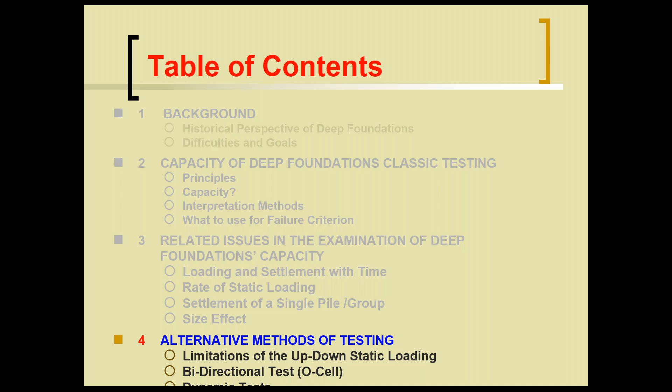I have to put a couple of slides on what I'm really dealing with most of the time - alternative methods of testing, limitations of up-down static load tests, a few slides on bidirectional testing. I wouldn't dare give a lecture to the memory of Osterberg without showing Osterberg cell results, and some dynamic tests. So let me go with the background.

First of all, we are part of a long-standing tradition - for 12,000 years we have evidence of people driving piles and building on piles. Four thousand years ago, the Swiss built islands based entirely on piles. We have evidence in writing by Herodotus, a 4th century BC Greek writer, who describes piles and pile driving. All the ancient peoples - the Egyptians, the Romans, the Chinese, the Mesopotamians - all relate to pile driving, and it didn't change over the years until about 100 and something years ago. They all drove timber piles into the ground by manual labor for thousands and thousands of years.

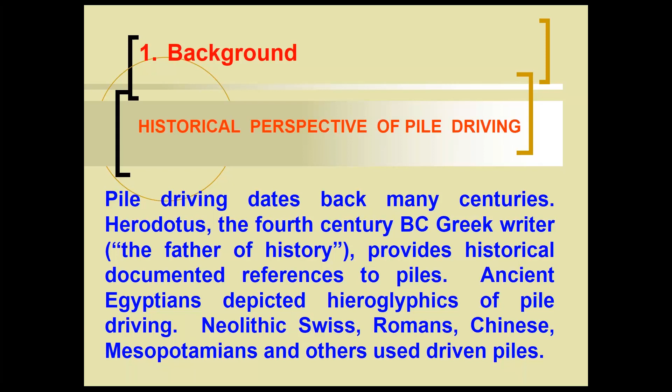We have Dutch friends here, and if you go to the Queen's Palace in Amsterdam, it stands on 4,000 driven timber piles. The machines they used were not that simple. This is, for example, a Roman pile driving machine used in the Gallic War by Julius Caesar to build bridges on the Rhine and the Mosel. If you go to Trier in Germany today on the Mosel, there is still a bridge you can drive on that is supported by timber piles built by the Romans.

A long tradition. Without getting much into it, you can essentially see there is a ram here made of timber, backed by a big stone. It can be inclined, so you can drive piles better, and it was working fantastically.

The first person to introduce mechanical driving was Otis Tufts - the guy Tufts University in Massachusetts, in Medford, is named after - and he invented the steam pile driver. That's not that long ago. Diesel hammers were invented after the Second World War. We're talking about 70, 80 years.

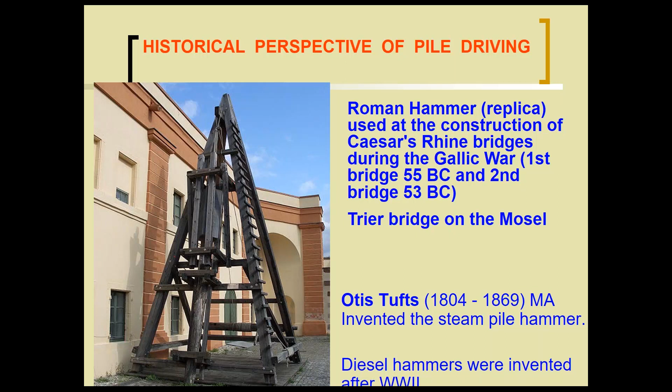We certainly have that within reach, especially the older piles. When we go to drilled foundation, it's much newer.

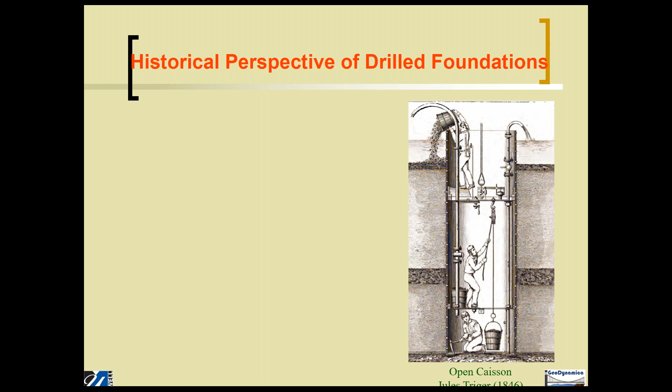This is a depiction of 1846 open caisson construction in Chicago, where essentially people dug by hand, cleaned it, brought it up in buckets while maintaining pumping of the water. If you look at that, it all started in the late 1800s due to large construction in parallel cities around the world—London, Chicago, Detroit, and so on.

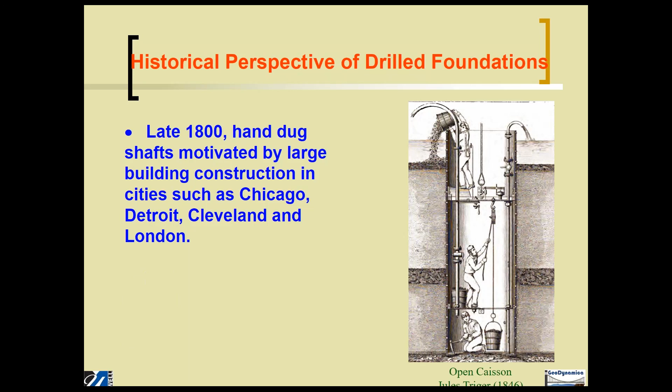And they all developed that drilled shaft foundation. The first person to start with a machine was Hough Williams in 1931. Just to put in perspective, Mr. Osterberg was 16 years old at that time. He built a very small machine for drilled foundation, nothing that you would consider as serious today.

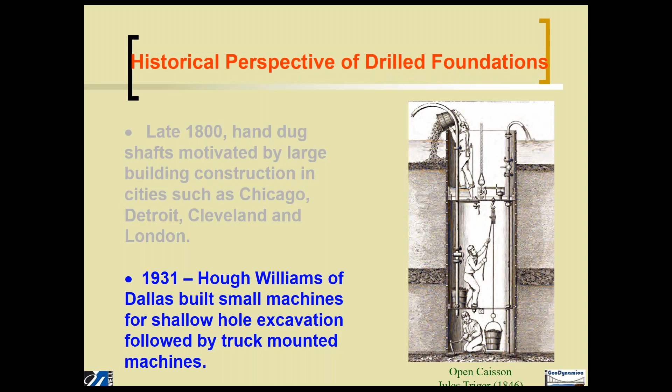So what we have done through this time, which is 70, 80 years, is enormous in pile driving and drilled foundations. We are sitting essentially on top of an era of unbelievable development in construction and methodologies of building foundations. Well, the problems remain, however, over the years the same.

We have a limited ability to check the capacity and the integrity of an element that we put into the ground, regardless of how we put it, and of course some areas are better than others. We have a very limited ability, and we have to struggle with that. As a result, we have uncertainty and conservatism that plagues the profession.

When we started collecting databases about 25, 30 years ago, there were the first databases that could show any performance of analysis. I remember giving a lecture in 2002 in Japan, where they gathered all the people around the world that dealt with reliability.

The lecturer before me came from Europe, and he said, we built all these wonderful Eurocode 7, however, we don't have any data to put into it. And then I showed up with hundreds of files that we analyzed. So uncertainty and conservatism really plagued the profession for years, and still is an issue we are dealing with today.

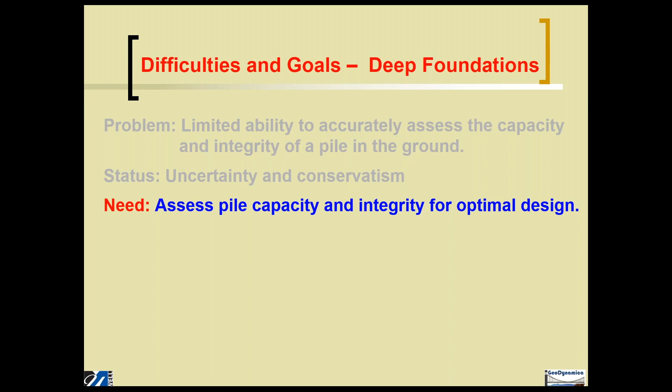At the end of the day, we put a member in the ground and want to make sure that it performs. So what we need is to assess pile capacity and integrity for optimal design, and the method is essentially testing. We are looking for testing that provides resistance, capacity, and integrity along with the soil-pile interaction, which we don't always get, and we'll talk about that.

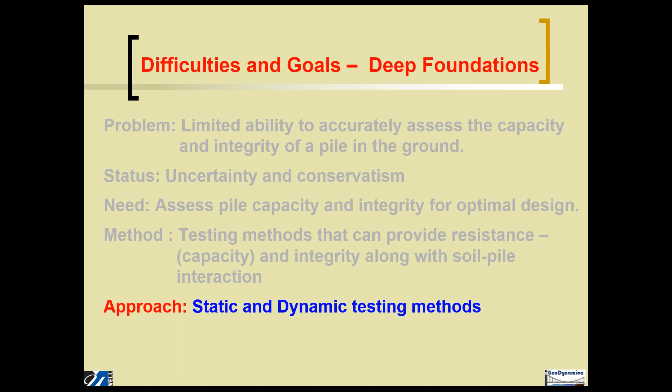My major approach, as I said, will look into static and dynamic testing of deep foundations, but I'll concentrate mostly on the static testing with limited reference to other testing methods, although that's essentially most of the work I do. I started explaining this in lectures these days, and I could certainly show you beautiful projects and interesting stuff, but I chose to go to the basics. Let's go to the basics.

What's the principle? First of all, the principle of the static testing is the up-down load test. Why is it an up-down load test? Because we are simulating the loading that we have—they are all gravitational, and they come from up-down, unless we have a pull-out or something of that sort.

It is, as a result, a benchmark for all the tests. It doesn't matter if we run dynamics, statnamic, or Osterberg—at the end of the day, we compare it to the static load test as our benchmark, and therefore it's important for us to understand exactly what we are doing and how it works.

So we have the capacity—there's a basis for capacity discussion. I promise I'll bring all the elementary stuff. So essentially, what is a test pile? What is pile testing? The load test—we have a test pile in the ground, either driven or drilled.

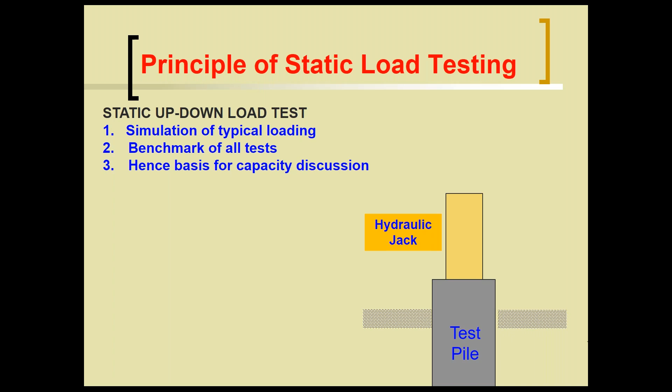And we put a jack on the top in order to apply load. And when we have an action, we need a reaction, so we put a reaction beam. Essentially, we put the action on the pile and the reaction against the beam. In order to hold the reaction, we use either anchor piles or anchors in the ground, which are being pulled out, or we use a dead weight to provide the reaction.

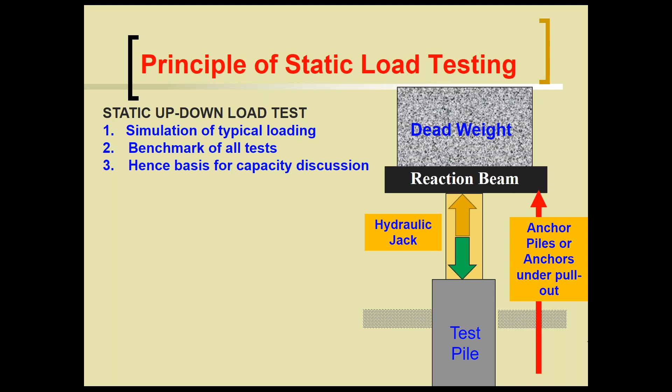We measure top force and displacement. This is the classical load test that we are running. If we really want to learn more, we have two things to get: first, to bring that pile to failure, and second, to really measure the interaction between the soil and the pile, which we can do only if we measure local displacement by telltales.

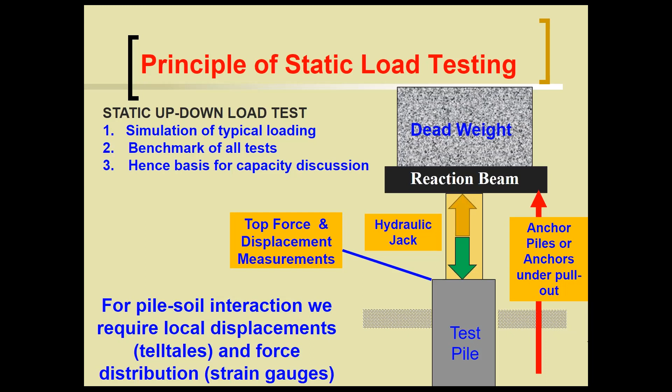In the past, we used them also for force distribution, which is not yet easy or accurate. For that purpose today, we are using strain gauges, and we have seen results of it earlier. ASTM provides us with all kinds of arrangement.

If you want to see the way it looks in real life, that's the way it looks. You will have, for example, 4 H-piles with cross beams that will support the reaction beam, and we apply the load. If we want dead weight, we can do that, and I have some nice pictures from India where essentially sacks of sand are being used as dead weight.

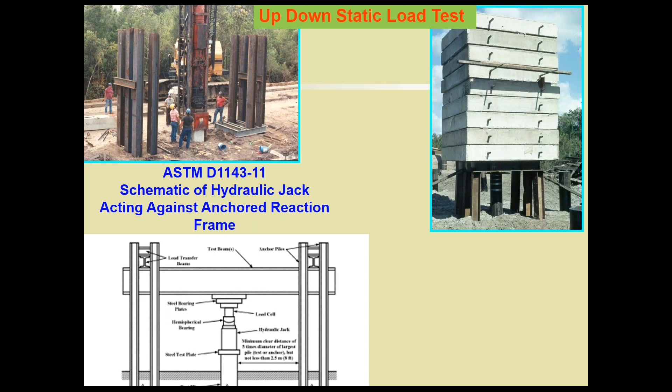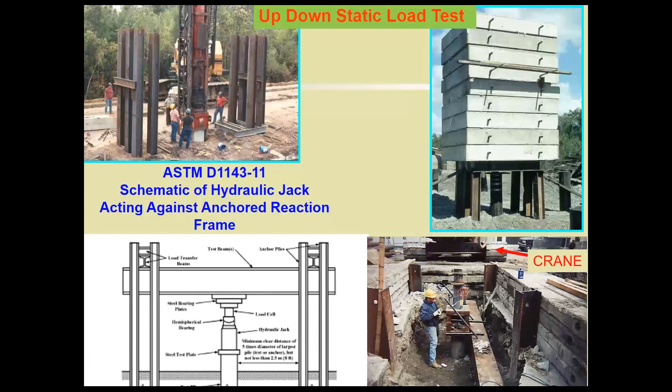And one nice one that I decided to show is an old one that was done by us, in which actually we use the crane. I don't think OSHA would ever approve of that anytime, and I don't suggest you'll do it yourself, but that was a long time ago. You can see we built a pit that looks more like an oil change in a garage, and then the crane that was in the background came forward, and we jacked against the crane as the reaction.

Innovation is all over the place. What is the largest one that I ever was involved with? It was a 72-inch pile that I just mentioned earlier, in which we actually checked plugged piles, comparing dynamic testing on full scale. This was a 3,000-ton load test, static load test.

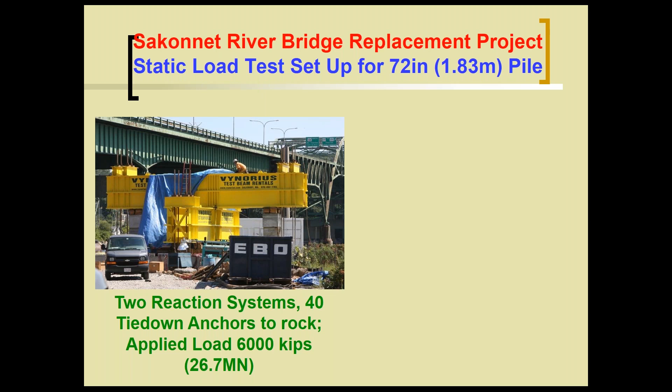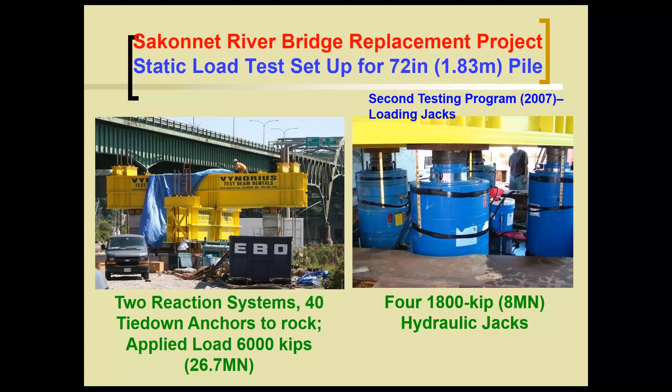You can see the two reaction beams crossing each other in order to get a huge moment of inertia at this huge loading, held by 40 tie-down anchors to a rock, and having 4 jacks. Each one is 900 tons. This is a massive load test that cost a few million dollars and was well justified.

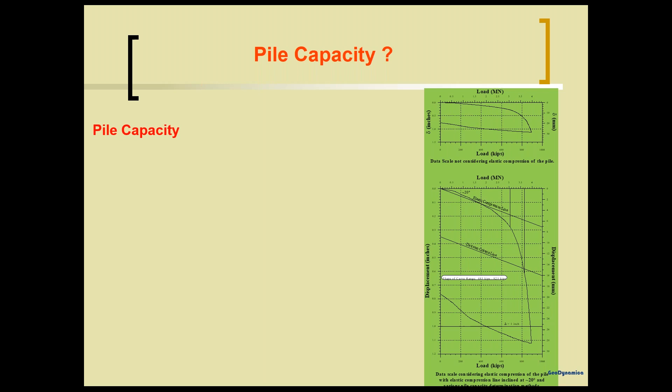And we ask ourselves, what is the pile capacity? So we want to interpret those results, which are the basic results from the measurement on the top of the pile. We first of all have to assume that we really arrived at failure, and we have a yield in which the load displacement can be examined. We're essentially looking at a location where we have excessive displacement under a small increment increase in the load.

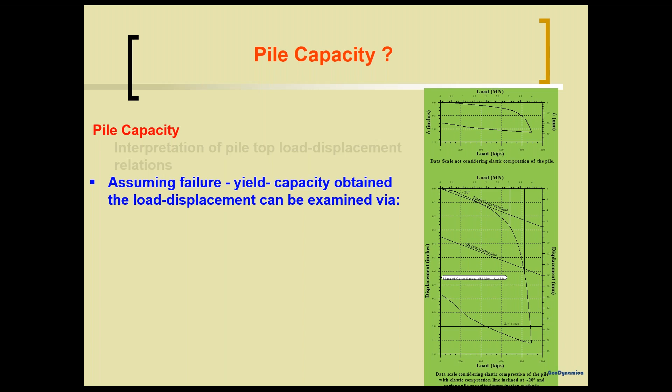We have displacement criteria that were used for years: 1 inch, 0.1b, all of them will do that. My friend Bengt Fellenius claims that our entire design of the pile should be essentially associated with a displacement criteria. We'll talk a little bit about that too.

There is the shape of the curve. When do we come to the point where we accelerate and we move from one regime to another regime of behavior, from elastic to more plastic behavior? And the interpretation often is not a unique value.

For that result, I would like to look at the load test that I'm just showing you here. I would like to see, if we look at the load displacement behavior here and here, you could guess probably where the capacity would be. Probably in this case it can be someplace here, and in this case it will be someplace there. I don't ask you because of lack of time, but I'm sure that you would more or less agree. The point that I'm trying to bring is this is the same load test.

It's the same data, just thrown on a different scale. So what I show you here is exactly the same load test, just on a different scale. The conclusion is, if you want to examine a load test, you have to look at a systematic scale that gives you proper interpretation. Those of you that remember Davisson many years ago, he came up with the idea that if you take the scale such that the elastic compression line will end up at 20 degrees, that will be a good scale to evaluate, and we use it systematically when we evaluate a load test.

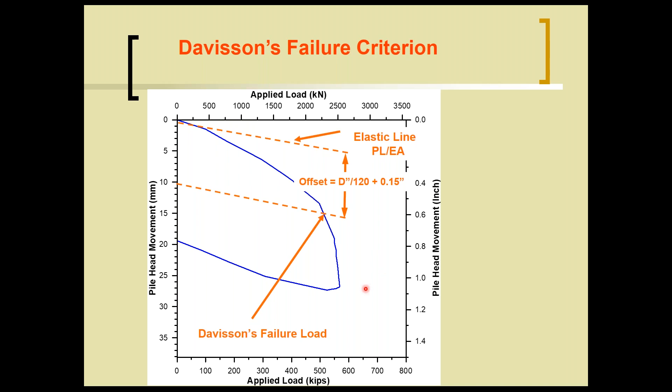He said, draw the elastic compression line, which essentially means take the pile with its characteristic as if it's freestanding and loaded, like it would be a column. Draw this elastic compression line that you learned in your first class in civil engineering, and then get an offset, and the offset is the diameter of the pile divided by 120, plus 0.15 inch.

Where did he take it from? The D over 120 comes from his assumption that that will be the displacement required to mobilize the end bearing, and the 0.15 inch comes from the displacement for developing local friction, which is independent of size.

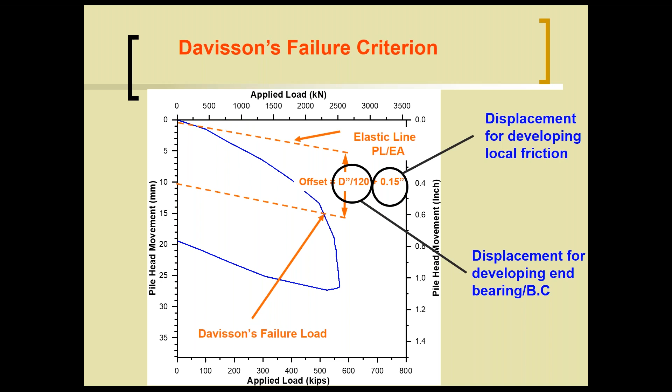We can check if he is right or wrong, but before that, just put scale in mind. In engineering today, with all the numbers running, the most important thing is to have scale in mind.

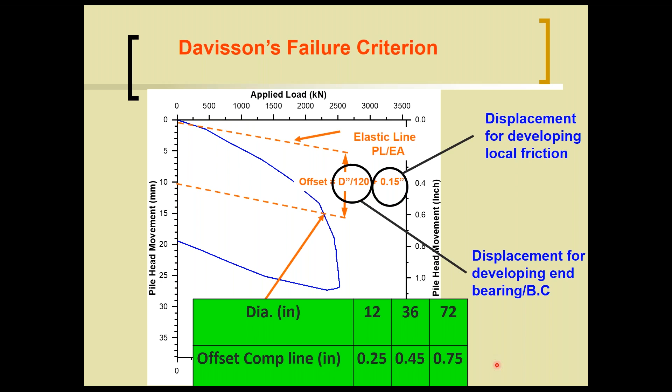The scale here is that if we have a 1 foot pile, we are talking about an offset alone of a quarter of an inch. If we have a 3 foot pile, we are talking about half an inch, and for a 72 inch pile, we are talking about an offset of three quarters of an inch. That becomes sizable, and in addition to that, we have the shortening of the freestanding column.

I'll show you in a second. To check the friction in undisturbed mode, as if it is actually a pile shaft that does not have any restrictions above and beyond what is the friction.

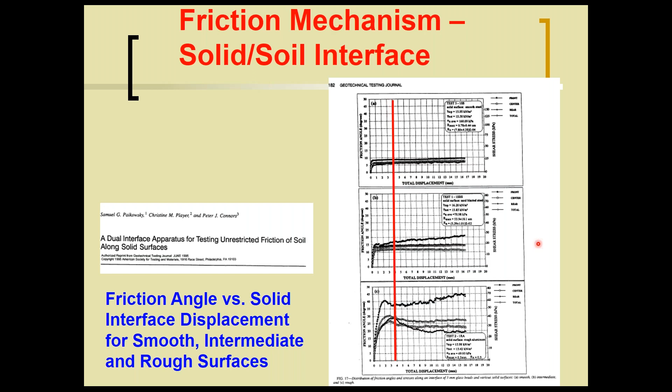Later on, I'll show that this is good only for piles that develop straight typical friction, like driven piles. It's not necessarily appropriate for drilled foundations, and we'll explain why.

We have all these criteria that hopefully you know: Davisson, shape of curve, displacement, and also maybe to mention De Beer, who developed it actually for shallow foundations, where he suggests drawing the load displacement on a log-log scale.

Somebody told you before about the square root or the square. That's the same situation in engineering. You draw everything on a log-log scale, and it looks reasonable.

The idea really behind it is to change the regime. Where does the regime change in the loading from more or less elastic to plastic, and then the asymptote of those lines is the failure, and it's certainly a good criteria for shallow foundations. We use it all the time.

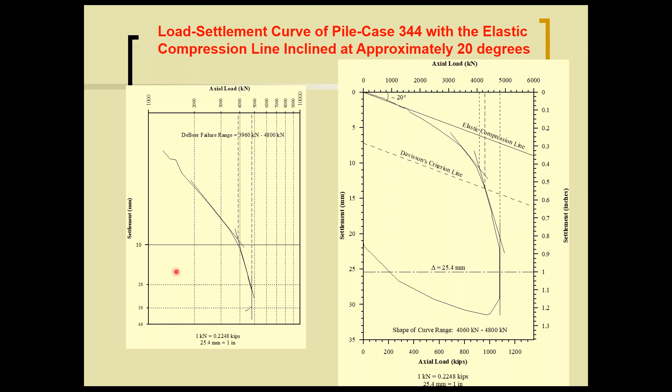Well, when we started working on those things, we collected a large database. That's an old database. Some people refer to it as the FHWA - it's not. FHWA helps us.

We took all these cases, digitized all the load displacement, analyzed them, first plotted them in a systematic way, just as I showed you, and analyzed them systematically. That was essentially the beginning of systematic calibration for the LRFD that came after. What we did there was evaluate, at the end of the day, what is the capacity, which is what is in this yellow row right here.

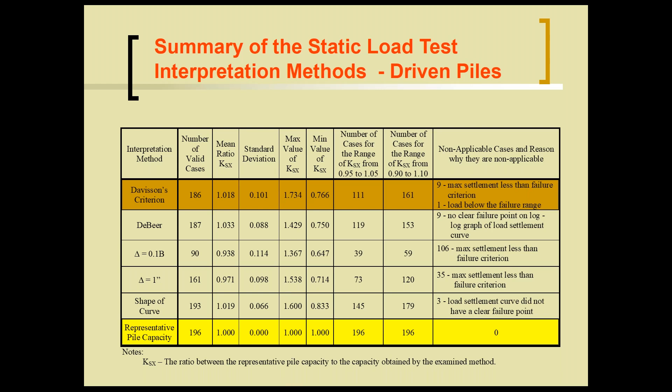And then compare each one of the methods to what we would consider the true capacity here. How did we define the true capacity? I can explain, but in short, it is the average of the viable solutions plus the shape of curve, which has some judgment in it.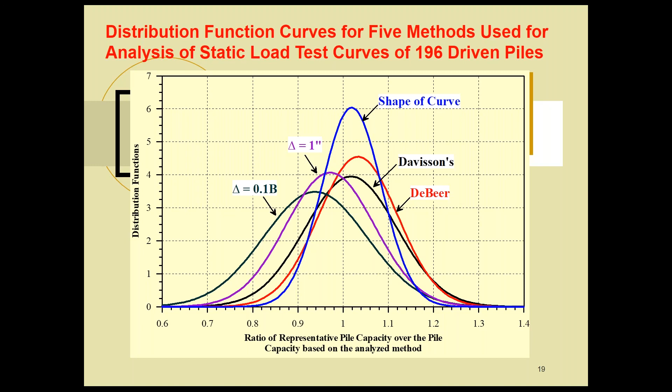And you can see that it worked fantastic. It actually works very well, and that should have been the method for us to analyze driven piles. So the Davisson failure criteria is the most objective, reasonable, unique method that provides a good result for the analysis of driven foundations. However, bear in mind this distribution.

It didn't work for all the piles. Within one standard deviation, we essentially took 0.15 up and down from the actual result. When I say 0.15, it means the ratio between what Davisson criteria would give versus what we thought is the actual capacity of the pile independently. And then we recommended, and later compared all the load tests we had results for, dynamic, static, no matter what, to that criterion. That's what we used, and most people, I think, adopted Davisson criteria.

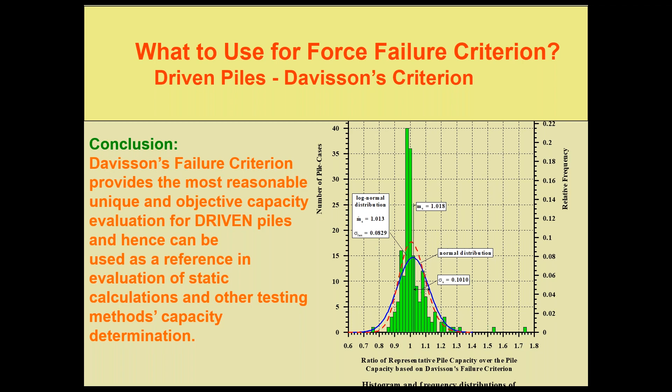We did the same for drilled foundations. There's no need to go here. We checked it on Davisson, De Beer, shape of curve, and what's called the FHWA method, which is O'Neill's method. And again, we got a distribution and so on. Davisson did not work well for drilled foundations, and you can see that. So if you use Davisson failure criterion for drilled foundations, there is an inherent problem.

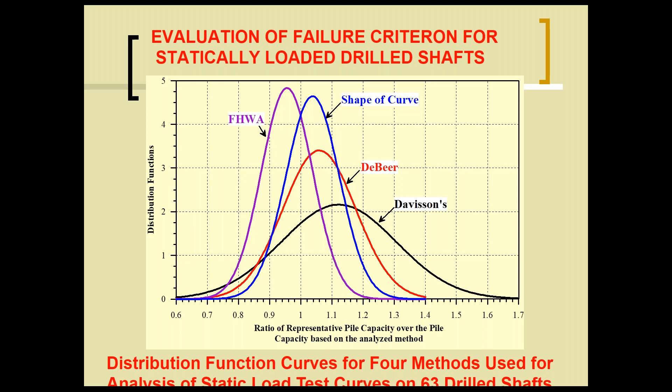We can explain it later in the lecture. What did we use? We used FHWA or O'Neill's criterion, 0.05B as the displacement. The takeaway from these few slides is that there is no unique failure criterion.

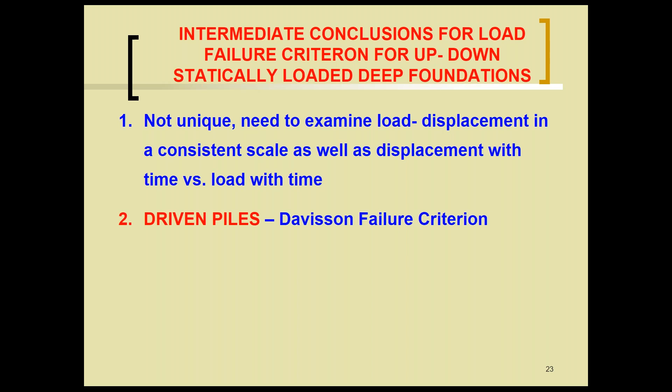You need to examine load displacement in a consistent scale, as well as displacement with time versus load with time, as I'll show soon. For driven piles, use Davisson failure criterion. It's systematic. There are a couple of exceptions, and I'll talk about them. And for drilled foundations, use Mike O'Neill's criterion of 5% of the diameter as the displacement at which you assign failure.

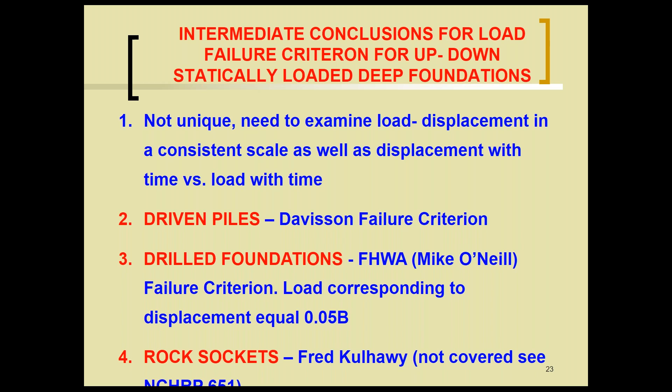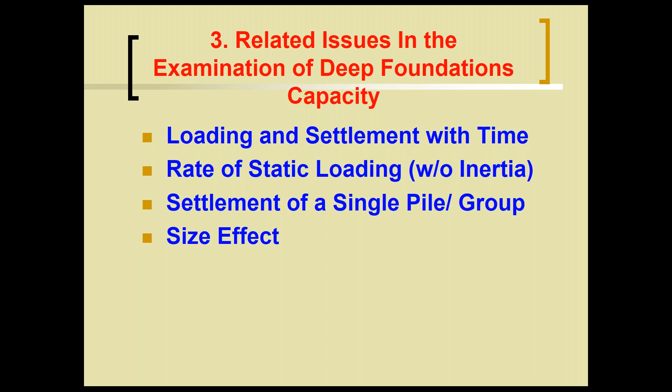So let's look at a couple of related issues. First of all, what did I mean by loading and settlement with time as a result of the load test? What is the effect of rate of static loading without inertia? The settlement of a single pile and a pile group, and a size effect. We'll do a few slides.

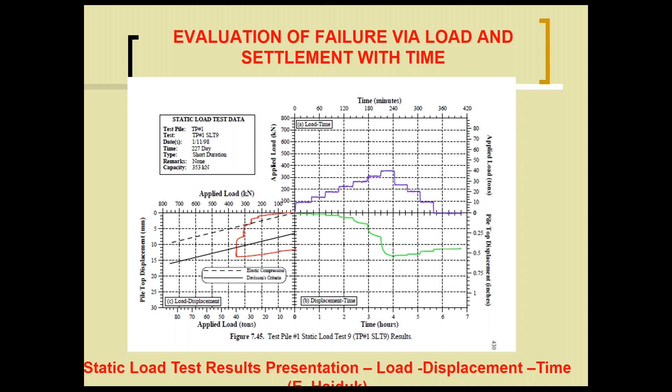You can, by looking at the load with time, especially on slow maintained or quick tests in which you have periods where you're holding the load, see very clearly where creep starts and you're essentially not able to hold the load. Same with the load and the displacement. Looking at those things is exceptionally rewarding and gives you a lot of insight. In today's time, when you collect the data, it doesn't really take much, and you get a lot of information. Let's look at the rate of static loading.

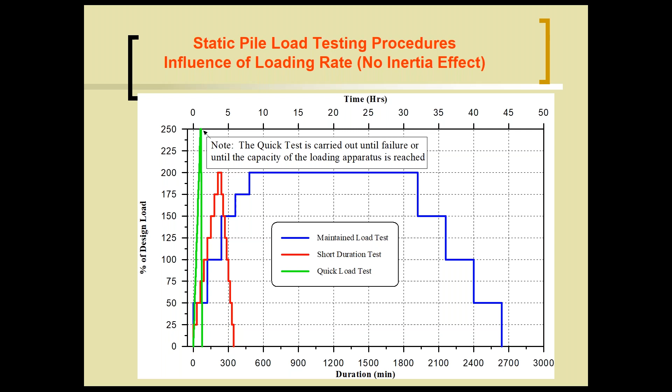It's not dynamic. What we did was run pile load tests - actually many more than I'll show you - comparing 3 testing methods on the same pile. On the right side is a concrete-driven pile, on the left side is a steel pile. What you see are 3 results.

The blue line is the slow maintained test, which took more than a day - the regular slow maintained test with 12 hours holding and so on. The red line is the short duration test, something in the order of 6 to 8 hours. And in green is a test we developed in collaboration - I'll speak about that in a second - a very quick load test. You apply 3 cycles of 15 minutes each of loading, come to failure, unload, reload. Each green cycle is about 15 minutes, so the whole test takes 45 minutes.

You don't see a big difference between them - there is no difference. As a matter of fact, the cyclic tests have a big advantage as far as defining failure goes. I can't go into it much deeper, but if you look at this location, the point where you have the load-unload intersection is exactly where you would define failure. It's on the books in the Massachusetts Highway Department. I'm not sure how many people use it, but the rate effect within quasi-static behavior is of no importance unless you're especially interested in creep.

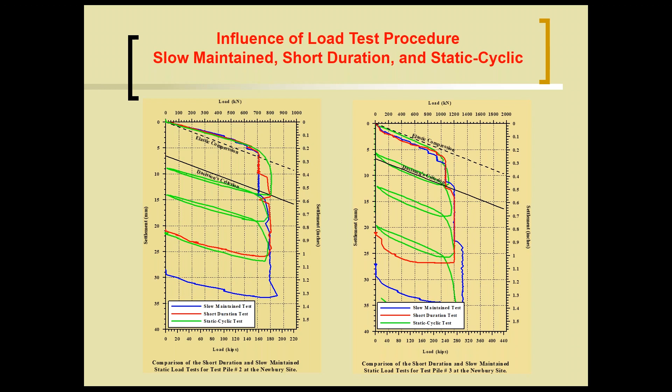So we collaborated. That was the time, under the Soviet Union, when there was a lot of fundamental research which was really good. These are 75 pile cases comparing slow maintained load versus the quick static cyclic test I just showed you, up to very large relative capacities. It shows there is no difference between the two, so you can run load tests with relatively fast duration and get the same result, as long as you come to failure.

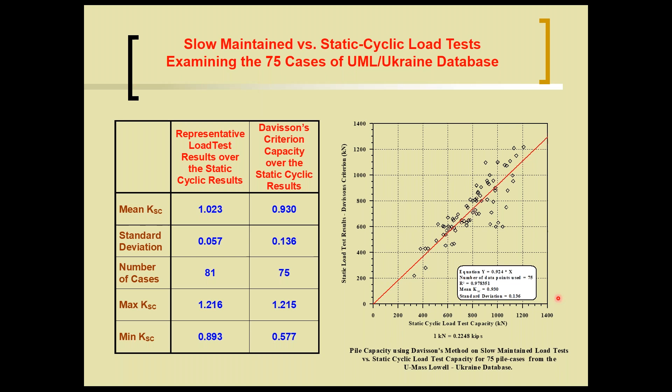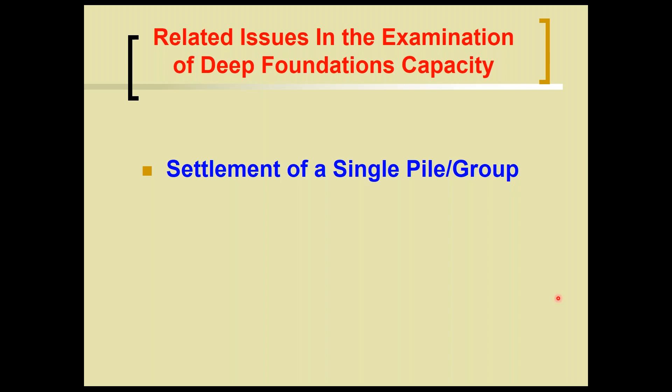Let's move now to settlement - what's going on with the settlement of a single pile and pile group? In general, in our practice, we tend to think that once you design a pile for a design load, you don't have an issue with settlement. We collected a lot of data about that. What you see here is essentially 5 groups of different piles - H piles, closed-ended, open-ended, drill shaft, and so on. Each cross represents a mean, standard deviation, and the extremes for one group of piles, checking the settlement of the pile under the design load.

The central red cross combines all the data of 105 piles. What you see is that the typical pile under the design load - all the way up to more than 2,000 kips, more than 100 tons, 1,000 tons - essentially maintains a settlement within about a quarter of an inch or less. So our common practice is: once we set a capacity and go to a design load - which, if we have a load test, is typically half of the capacity - we have very limited settlement, and we're pretty fine.

As a result of that, the load of the average is very high. You can see it's close to 2,500 kips. However, the average settlement is about the same. It's smaller than 0.2 inches.

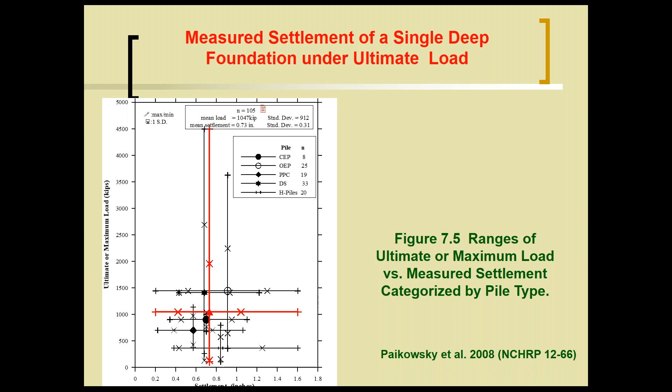The next thing to look at is what happens if we have a group of piles. Definitely in driven foundations, we work only in groups, and that's the ratio between the settlement of a group of piles to a single pile as a function of the spacing. So typical spacing will be 3 diameters, and that's about 1.5 times.

If we go to smaller spacing, which is 2 diameters, which essentially we don't do usually, we come to a large increase in the displacement. If we go more than 3 diameters, to 4 to 6 diameters, we are talking about 1.25 times the single pile settlement of the group.

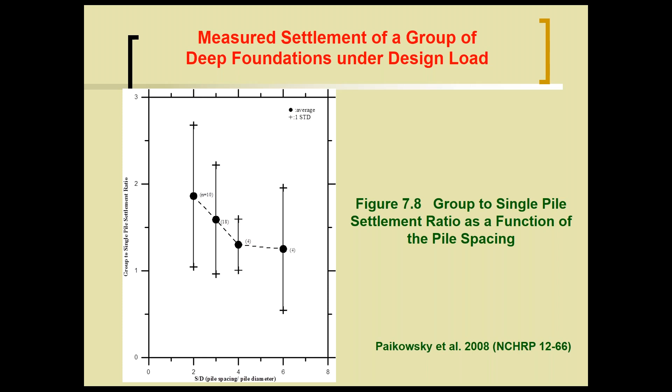The last one was size effect. I don't show much data, but I'll explain what I did and why. There was a claim the Davisson criterion is not good for large piles, and that we have to increase the tip displacement ratio instead of B over 120 to B over 30. That was the claim.

We decided to check it independently, and we examined it by looking at a database in which we showed the bias of the method and whether it changes with the diameter. Then we took a separate group of 30 large piles that were over 2 feet in diameter and checked whether the criterion really changes if a failure goes there. There is no justification for that. Davisson criterion worked fine for large piles and small piles, and the criterion is good. There is no need for modification. So the size effect was not really anything that we got.

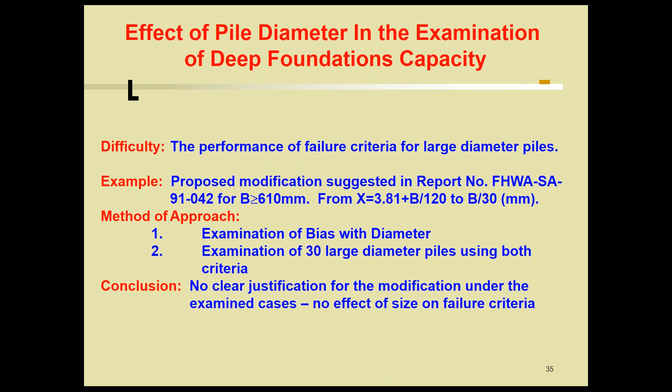Well, we are coming to alternative methods of testing. So why should we use alternative methods of testing? Because the static load test has major limitations, and you could see it in the presentation today. They did not run a static load test.

I, as a matter of fact, started my career in 1979 measuring dynamic measurements with an analog PDA that not many people would know what it is, and measuring static load tests on offshore piles to full capacity. It's very expensive. There is no question that a static load test, up-down, is very expensive.

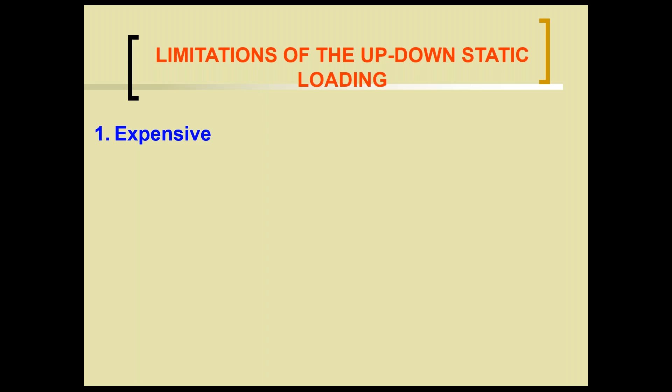It's very time-consuming, and I'll show you in a second what you need to do if a certain phenomenon is immediate, to test right away.

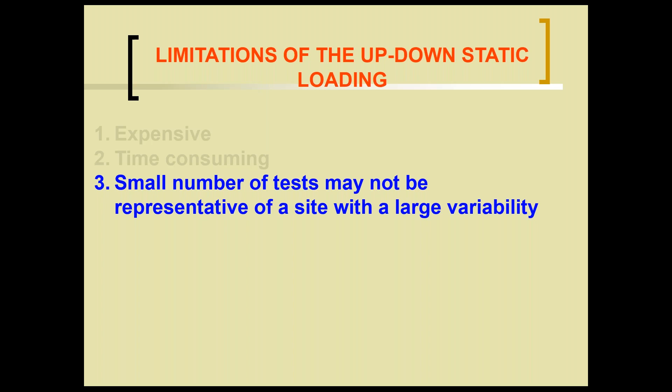We're running a small number of tests. They cannot be representative if there is a large variability. Unfortunately, the current AASHTO specification took out our portion in which we connected the number of tests to site variability, and explained how you get site variability as a number and what number of tests you should use. It's not there anymore, but it should have been, because that's part of the issue: how many tests you need according to the site variability.

And then if you have a problem, let's say you drill the drilled shaft and you want to test it, and the drilled shaft got screwed up. What do you do? You're ending up with one test that is not good, but the foundation is good. So all these difficulties really give us the limitation of the up-down static load test.

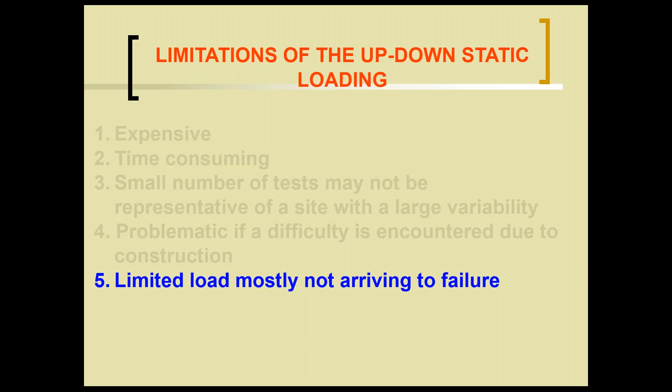In most cases, we don't even come to failure. I remember when coming to the United States, I was interested, and I found out that only 8 states in the Union had a code that requires a static load test to failure. The majority requires twice the design load or a little bit above it. So if you don't get to failure, you essentially don't learn too much, because it's a proof test and not a load test. And of course, that's generic.

You need additional effort of strain gauges and measurement in order to measure the distribution with depth. All right, let's touch on the Osterberg cell, or the bi-directional cell, the new ASTM standard. I'll just bring a few slides on here.

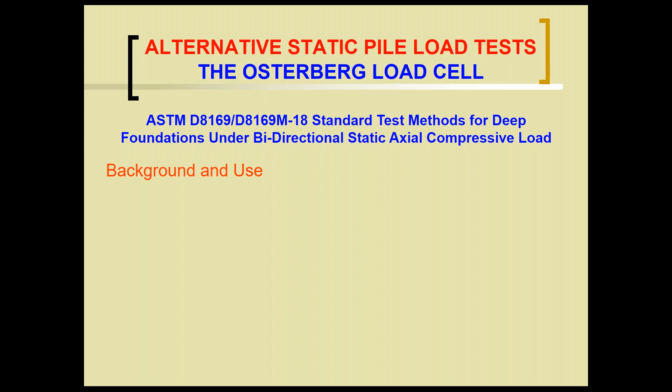We don't have the time, but I don't think it's appropriate to give this lecture to the memory of Jorj Osterberg without mentioning the Osterberg cell. That's certainly the other alternative for a static load test, only that we are loading it from the bottom up instead of top-down.

His major innovation was essentially developing something consistent, good quality engineering. I knew before that people were using flat jacks to measure drilled foundations, small ones, and it worked fine, but it was not the same. He really established a methodology that worked technically fine, does not require reaction, and as a result, we are much more affordable. Of course it has disadvantages too, but that was the biggest advantage - to be able to load test especially large elements like drilled foundations.

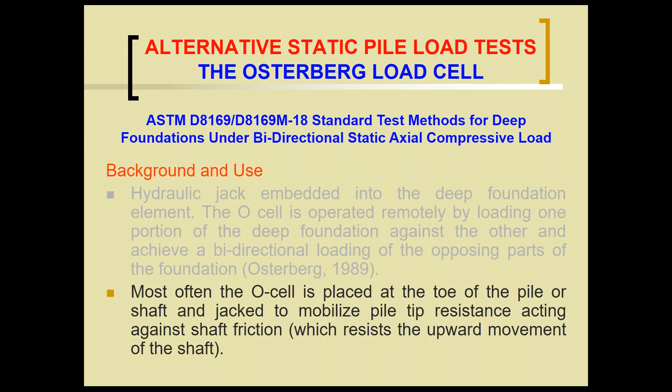Mostly we put it, as you know, on the bottom part, either on rock at the real bottom or above it, and we run a test. I'll just show two examples which are non-traditional, because otherwise we didn't get much out of it - it's repetitive.

This is an Osterberg cell load test that sponsored this lecture many, many years ago, and we actually mounted it on a driven pile, at the bottom of a driven pile. At that time we developed a 6-inch stroke, which was not the common design. It was a 100-foot pile.

Why did we do that? Because we were interested in gain of capacity with time. Until you build the reaction and everything, most of your data is already gone - you essentially load the pile after it already gained 3, 4, 5, 6 times its capacity from the beginning of driving. So we did that.

Those were our piles - there were 3 piles actually in the test. You see them on the left. The one that went all the way down is about 100 feet long, that's TP1, and where you have the red circle on the bottom is an Osterberg cell on a driven pile.

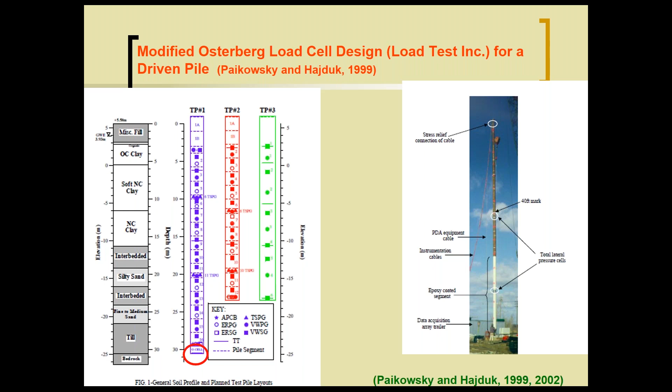I won't get into much of the study, but I'll show you that we ran this test, and the measurement here is hours after the end of driving - so you can avoid the zero at the beginning, at the end of driving. You can see that pile had very little capacity; within the clay layers there was no resistance whatsoever.

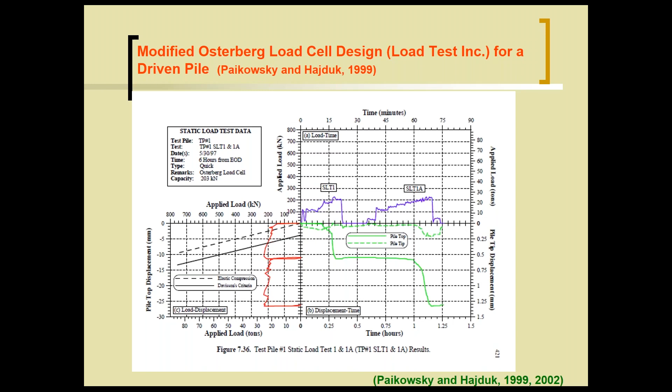What I'll show you is the gain of capacity with time. The first test was completed within 6 hours after driving the pile, and you can see the resistance, shown here in kN on the right or tons on the left, and it's minuscule. As a matter of fact, it was practically zero at the end of driving within the clay due to the high pore pressure that was developed.

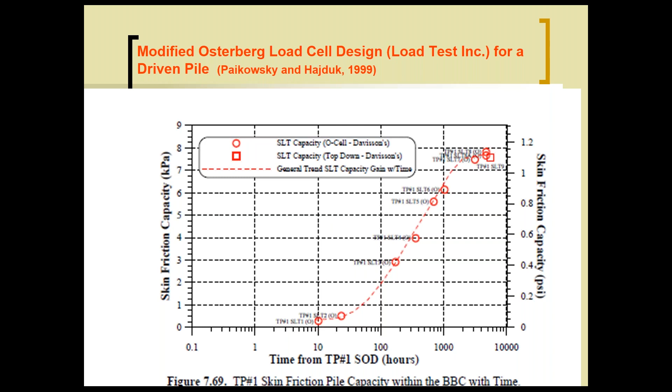The other example I'll show is a recent test done with GRL in Israel. What you see is the thermal integrity profiling of a bidirectional load test, and there are two issues to take out of it. First, you can phenomenally learn about the shape of your drilled shaft exactly the way it's built - tremendous knowledge, well beyond CSL which only gives you integrity between the tubes. On the right-hand side you have the TIP analysis.

You can see the bottom where the load is, but more interestingly, look at the shape of the pile - that's not unusual for a drilled foundation. What does it mean? It means that when we load elements like this, we do not have typical frictional behavior. We have it in areas where there's a change in diameter, and that's actually nice.

In CFA, we can get much more than that. But we are talking about these areas - a relatively large change in diameter, which contributes much more than asperities in the friction between solid and soil.

That means essentially you have another mechanism, more associated with end bearing resistance, rather than top down. As a result, when we checked those drilled foundations and came up with what kind of interpretation would be appropriate for the load test, Davisson cannot work for that, because the entire mechanism we see in drilled foundations very commonly is not the typical friction.

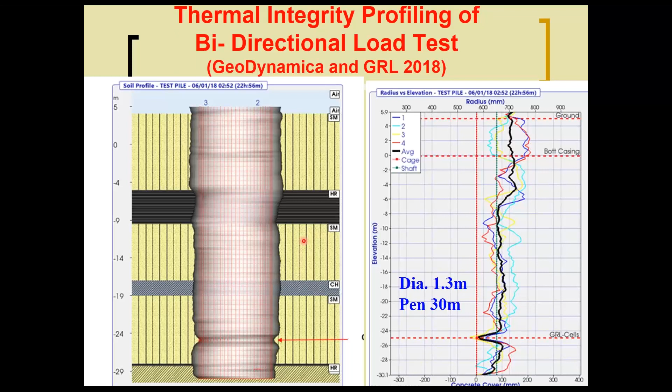That also affects our dynamic test results. Very often we see these results and people say it doesn't mean anything, it's not good. Well, that's part of the issue we have - the friction is not the typical friction that we see.

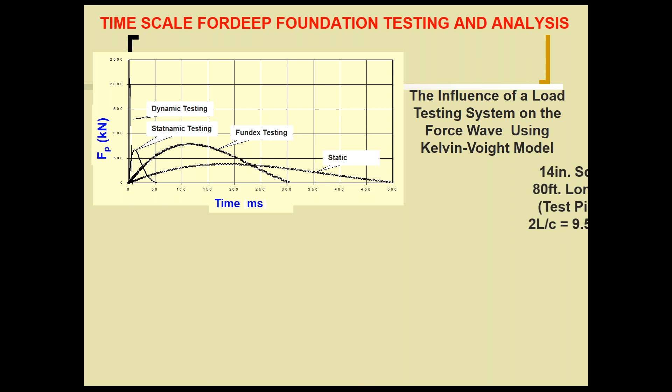And the question is, does it really look like that in real life? Here you have one of our tests on a 14-inch square pipe pile, a concrete pile, and you can see the actual measurement from a dynamic wave to a statnamic wave test that we ran, to static cyclic, which takes very fast, 15 minutes, all with short duration. I didn't put the slow maintained load test here because the scale would get out of hand on the next slide.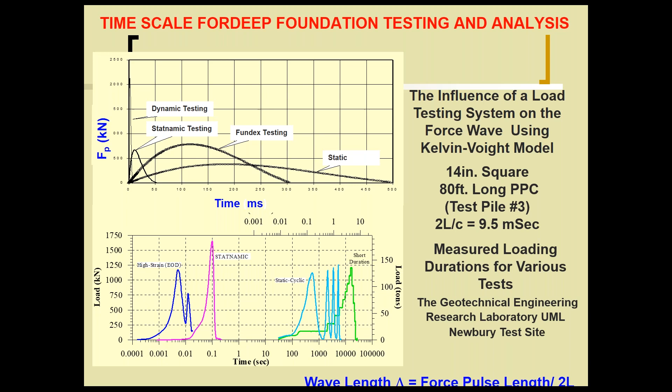You can see there's a real importance to this - it's not only academic. What it means, and I can't go deeply into it, is that if we measure the so-called wavelength - the whole concept was developed by Holeyman - you essentially measure under the dynamic effect what's the length of the wave you send relative to the distance it has to travel down and up. The shorter the wavelength, the better you can analyze the interaction of the pile and the soil. So every method has advantages and disadvantages. Bear in mind, when people give you analysis of a driven pile with CAPWAP and others, that there are advantages and disadvantages.

Just a couple of words on the basic principle of dynamic testing. Essentially, we are trying to get a static capacity out of the dynamic behavior of the pile during driving. Why can we do it? Because in principle, if we run a driven pile or impact a drilled foundation and that unit moves, we essentially conduct a very fast load test under each blow. So there's a well-justified basis for taking the dynamic results under a single blow and looking at it as a load test. It's a quick load test, as long as it penetrated - you had a load test, or if not, how long?

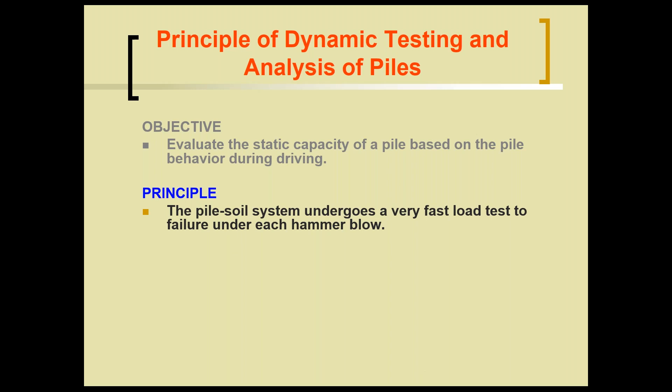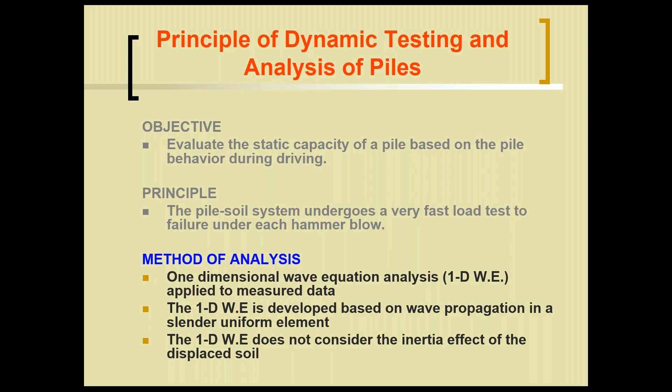What is the method of analysis we are using? We use the one-dimensional wave equation, and here comes the pitfall. The one-dimensional wave equation was developed on the basis of wave propagation in a slender, uniform element. If you want to move from three-dimensional to one-dimensional, you have to simplify by assuming the element is uniform and slender. Okay, that's fine - that happens with most driven piles, that will be the case. However, it does not consider inertia effects, and in many of our analyses, we violate that. Thanks to the lecturer before me, I can refer to it.

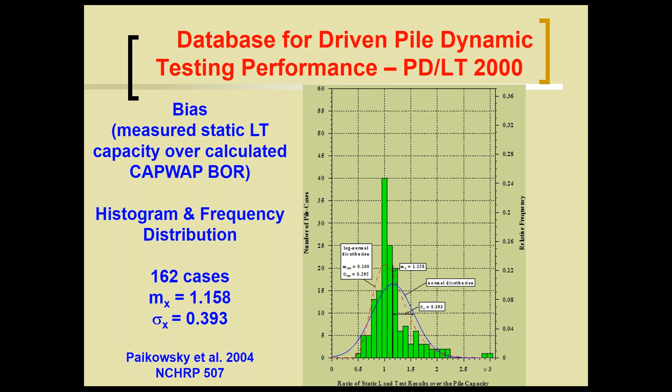So if the number is greater than 1, we have a certain 15% extra. It's interesting that the first lecturer here today mentioned the 50%, but it's a small sample - mostly just incidental. So it works very well.

In drill shaft that can be mobilized, it actually works even better because you don't have an inertia effect at all. You did not move the soil when you drove the pile, you drilled it, and we have done since then more comparisons between drilled foundations and capacity on signal matching.

So what are the not-so-good news? We encounter difficulties when our assumptions of the theory are violated. That's why it's so critical to understand what you're doing.

Where do we encounter this? The first lecture talked about plugged piles. We solved it by essentially another analysis where we do signal matching with different models for the plug and the interaction between them. I did not show it, wanted to leave things simple, but here is an example where the interaction between the soil and the pile occurs when it's plugged, not when it's unplugged.

When it's plugged, with soil inside, it creates a situation that violates the basic one-dimensional wave equation. As a result, we have lower capacity. There are many ways to address it.

What happens with non-uniform drilled foundations? We heard it from the second lecture with the pipes and the variation. We worked for years on that, and we did analysis.

What happened? We have large soil inertia - you have easy driving, there are large movements. We actually measured it in collaboration with Delft in Holland to measure what is the acceleration of the soil that moves when you drive the pile.

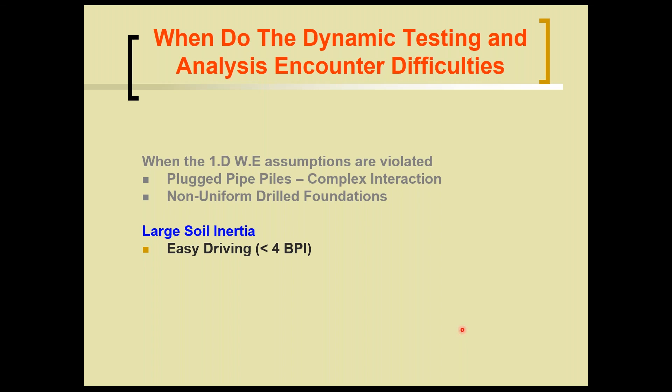Somebody talked here about liquefaction - we're ahead of the pile, that's exactly the case. So that will all affect your results and essentially create an inaccuracy.

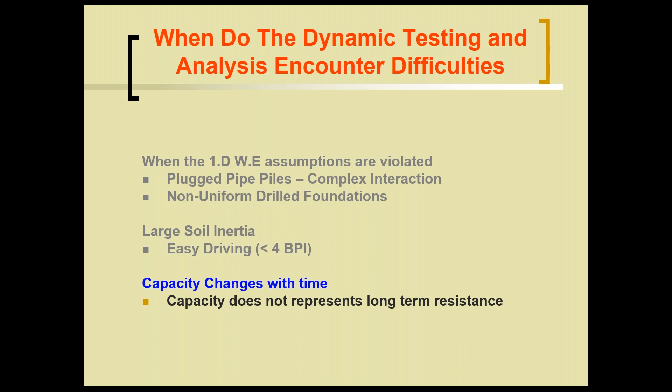Capacity change in time is inevitable if you try to get capacity from a dynamic test, and later the pile gains or loses capacity. It reflects only the time of the test, and you should be aware of that.

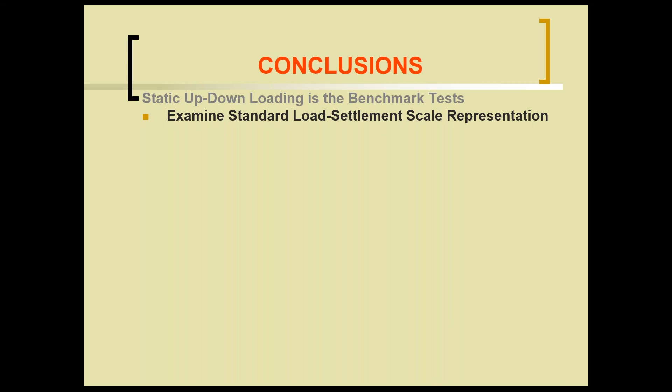I think we came to a conclusion. Regarding static up-down loading, this is a benchmark for the test. You want to get the best out of it. Examine the standard load settlement scale representation - don't just throw it in every scale that you want because you lose a lot of the data.

Use Davisson criteria for driven piles - no question about that, it works well. Use the O'Neill's criterion, the 5% of the diameter, for drilled foundations.

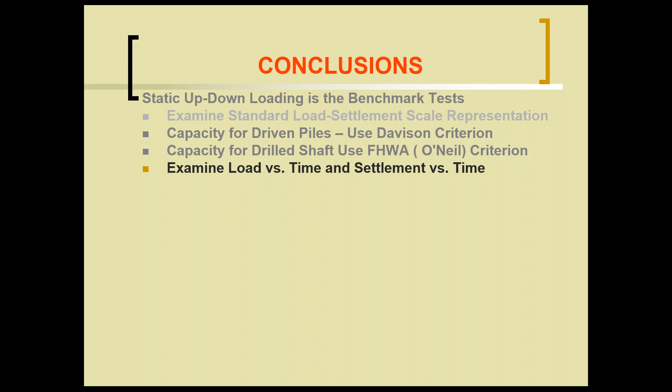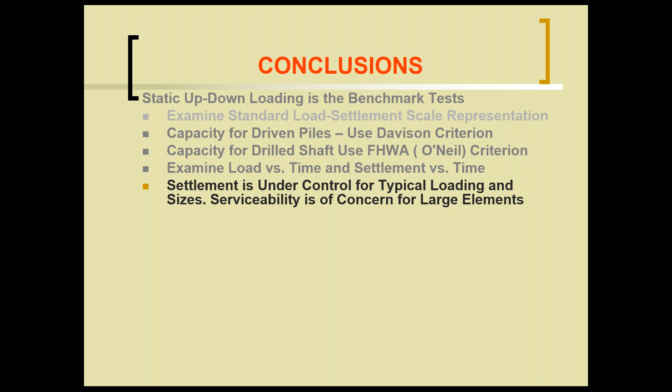Examine load versus time and settlement versus time in addition to the load displacement to gain insights. Settlement is under control for typical loading sizes - serviceability is of concern only for really large elements, and you have to consider what serviceability means when dealing with piles of 6 feet, 5 feet, 8 feet and so on, because that will play into the design.

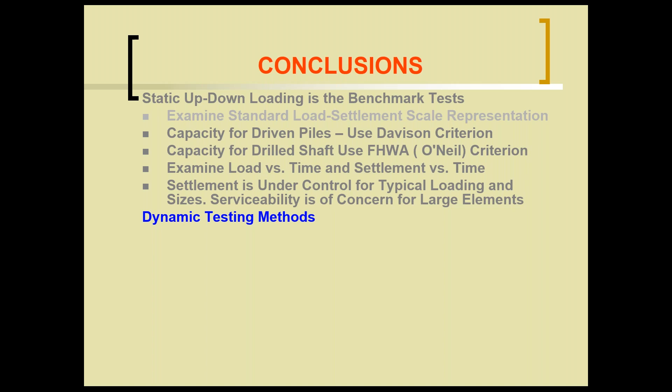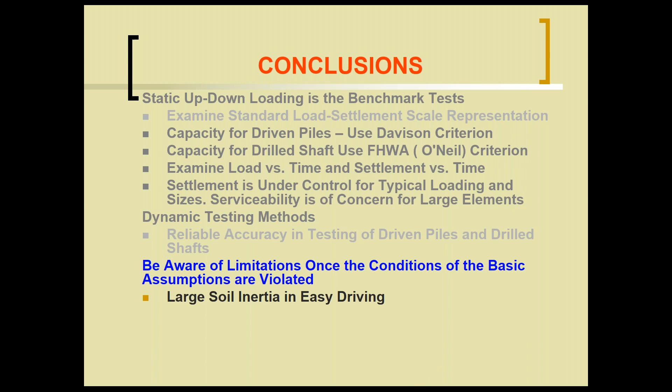In dynamic testing, the reliable accuracy in testing of driven piles and drilled shafts - we definitely gain that, and be aware of limitations once the basic assumptions are violated: large soil inertia in very easy driving, plugging of piles, non-uniform drilled shafts, and capacity change with time.

I want to just say a few acknowledgments besides the people that invited me here. You work on this over the years - it's 40 years - from the people that were your mentors, and I was very lucky in that at the Israel Institute of Technology.

I worked with a guy by the name of George Zeitlin, a phenomenal graduate of MIT in 1939 who served in the Second World War for 5 years, including D-Day, and had tremendous experience.

I was also fortunate enough to have wonderful students when I moved to UMass Lowell, completely incidentally, and I stayed there because I had wonderful students over the years who helped me, along with the support of many research projects.

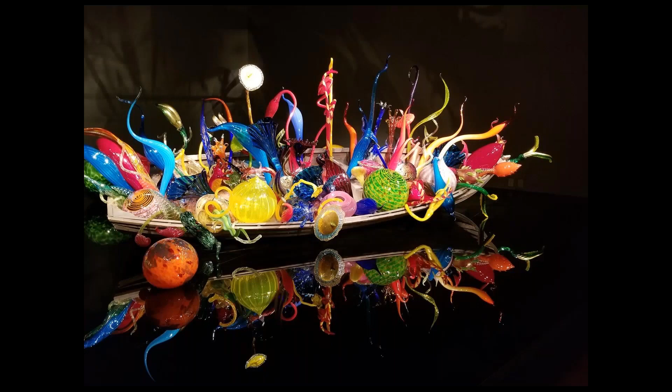If you have time, go see the Chihuly Museum - that's a picture from there. Thank you very much for the attention and the lecture. If you have any questions and we have time, I'll be happy to answer.

Samuel, thank you very much for decades of enlightenment. Thank you, thank you - holy cow. Sure, okay, we got this. And thanks very much on behalf of the DFI.